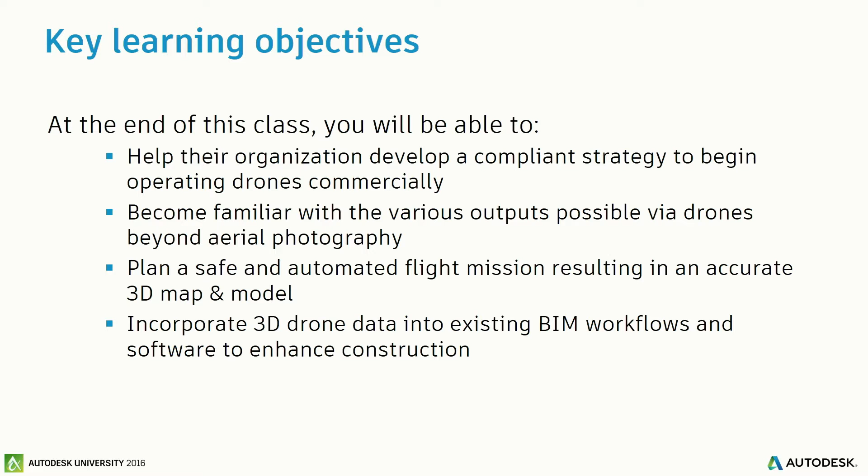Our objectives today: we'd hope that at the end of this course you'd be able to help your organization develop a strategy to operate drones in a compliant manner commercially, and become familiar, if not experts, on all the various outputs possible via drones beyond aerial photography. We'd also like for you to leave being able to plan a safe automated flight mission resulting in accurate 3D maps and models, and incorporate that data into your existing BIM workflows.

About VDC at B&G - I think it helps to understand why a construction company is interested in drones if you understand a little about what our group does. First off, about B&G: we're one of the largest privately held construction firms in the nation, a little over 50 years old, with over 2,500 employees and over 200 active jobs. We span the entire gamut of market sectors, from building water treatment plants to the Braves Stadium and everything in between.

We're heavily awarded - number one contractor ENR Southeast, number one green contractor ENR Southeast, ABC's 2014 National Contractor of the Year. We're doing about $2.5 billion in annual work. I say all this to illustrate the strength of our company and how far we've come over the last 50 years, from a small regional contractor to now having completed work in close to 40 of the 50 states.

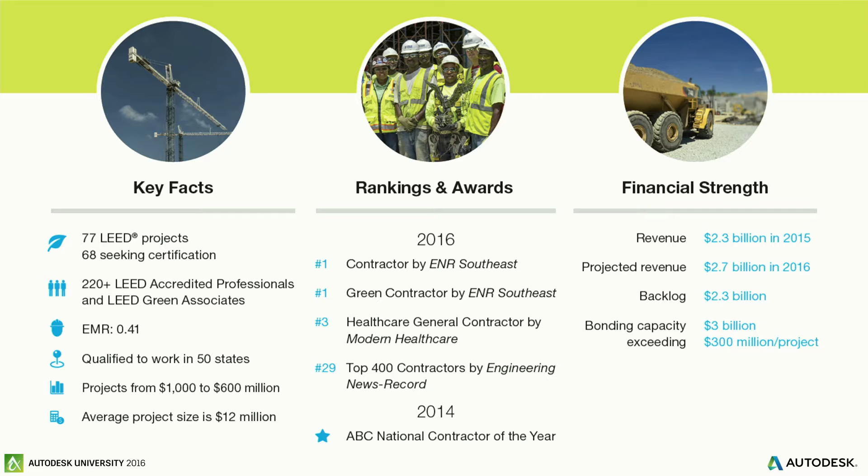About VDC - if you're in the BIM world, you've probably heard of VDC, Virtual Design and Construction. We're a BIM group, ultimately. We touch every phase of the construction process, from marketing and assisting with rendering, to helping our pre-con teams estimate quantities, to helping our scheduling teams with 4D schedules and animations, all the way to our safety and field operations with robotic layout, drones, and QA/QC.

Because of that, we're in a place where we get to work with a lot of emerging technologies, drones being one of them. We're also kind of reality capture experts across the gamut, with a scanning group in operation in-house. AR/VR is big for us, and many other initiatives.

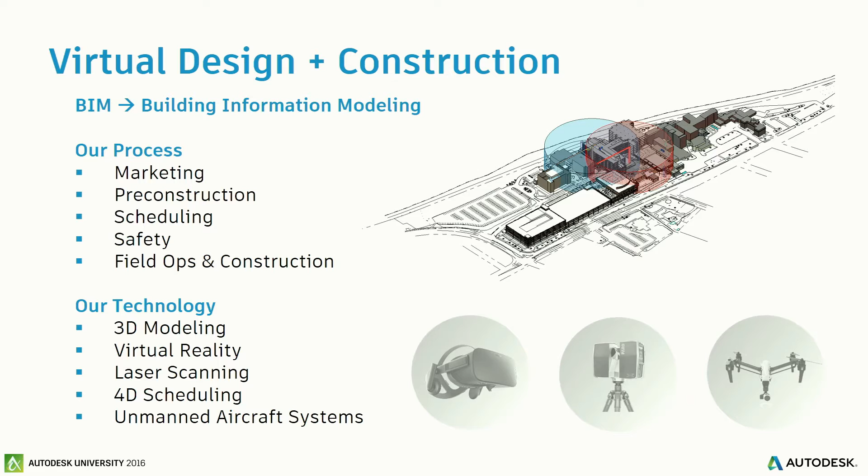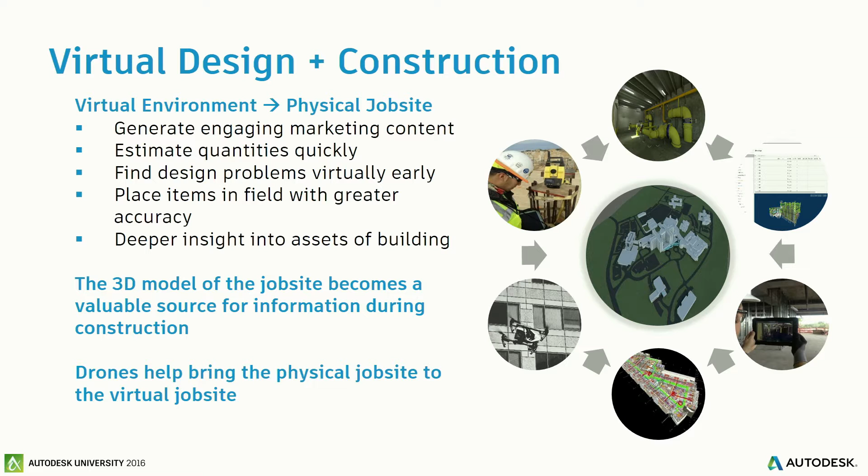So why are we interested in using drones to build 3D models? Our group sees it as our mission to make the virtual model mimic the actual job site, so all of those technologies feed into that 3D model. With drones we can get point clouds and bring them into the model along with our pre-construction software. We're all pushing information back to a centralized model so project teams have current and up-to-date information at all times, and that model becomes the true source of information for an active job. Drones right now are a really good tool to help bring that content to the model.

So a little bit about drones in general - if you're not familiar, we try to tailor this to every area of expertise or level of expertise. UAS is what we call them; we're not going to fight the battle of UAS versus UAV versus just drones. The FAA goes with UAS, so that's what we've decided to stick with internally. It's not just a children's toy, but a serious tool in the right hands with the right software.

So many of you may own drones, your children might own drones. Even with consumer-level drones and the right applications, you can get really valuable data, and it becomes a great tool for construction. We're seeing an exponential demand for drone services on our projects, both being driven internally, from our project teams, and externally, as our clients are starting to expect and request drone-based services on our jobs.

About the industry in general, over the next 3 years, it's estimated that drones are going to create a $14 billion economic impact in the US alone and create 70,000 jobs. So it's a real technology that's here to stay.

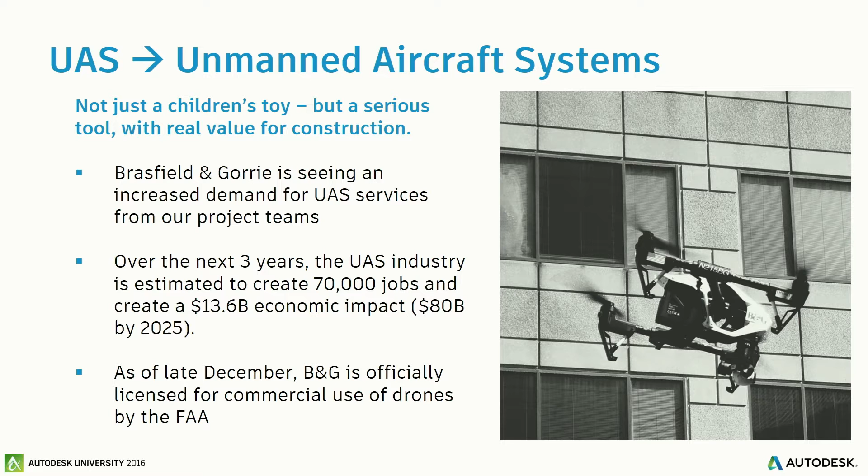And as of late December 2015, Brasfield and Gorrie is officially licensed for commercial use of drones. Those more familiar would know that as the Section 333 exemption. We were one of the first contractors in our state to get that, and we were really proud to do things the right way.

But how do they actually add value to our projects? Instant return on investment with drones. The cost of getting started with drones has come down so much that you can really fly the thing once and pay for itself. Everybody knows they're great for high-quality aerial progress photos and video, but that's really just the low-hanging fruit. We can do other cool stuff, like time-lapse videos, quick site familiarization, hazardous area inspection, which is really becoming big for our safety teams.

But when you take that further and start creating 3D models, you get a much deeper level of project insight. We're able to generate a point cloud and 3D mesh, take measurements within that environment, quantify stockpiles, quantify area, and so forth. Then we can start to daily monitor our progress, such as how much earth did my site work subcontractor move yesterday, or where are we according to schedule. We're able to get that information real time, really quickly by using unmanned aircraft systems.

So to get these models, how does that work? Many of you in the reality capture field are probably familiar with photogrammetry, a big long word for really complex algorithms basically. By taking 2D images that are geolocated and running that through specialized software, we're able to stitch those images together based on common parameters into a 3D point cloud. Basically, you can think of it as a method to take 2D images into a 3D model.

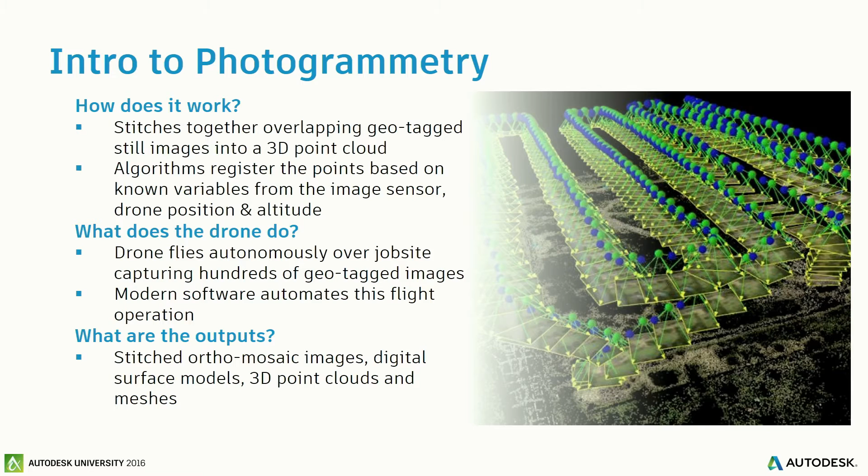So I would hope to share a little bit about where we've come from next.

Kind of our first getting our feet in the water with drones and uses, and trying to figure out whether or not this is something that we were going to actually pursue. I'm going to tell you a little bit about a project. This is actually located in Birmingham, Grandview Medical Center, and it began construction about 10 or 12 years ago, and the project stalled after we completed the shell of the building due to insufficient funding, some other things. When the project got picked back up, there were concerns with the integrity of the facade of the building. So we saw this as an opportunity to see what possibilities were out there.

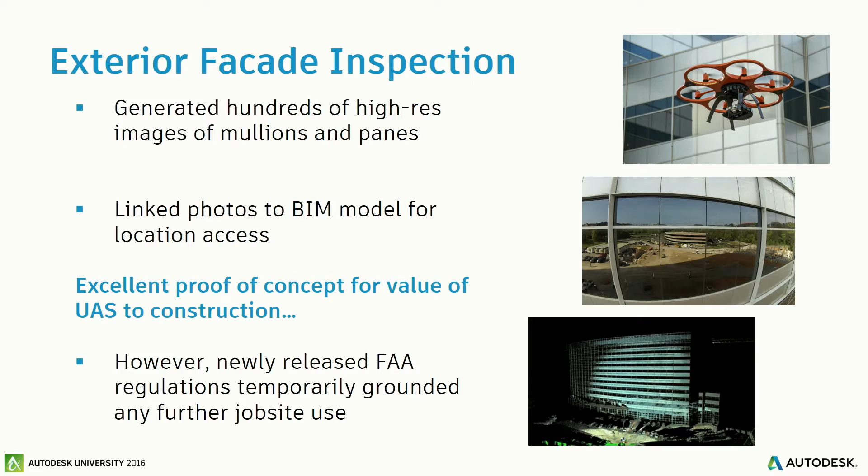So we partnered with Auburn University and Leica Geosystems and went out to the site and actually utilized the drone to go through and take very detailed photographs at every intersection of mullions on the curtain wall, and used that basically as an inspection. The value of this would be, instead of having a swing stage or something like that set up and having personnel out there setting up multiple times, going back and forth to manually inspect it, we're able to fly a drone out there, and we actually geolocated all the photos and linked them to a model as well.

So testing and challenges.

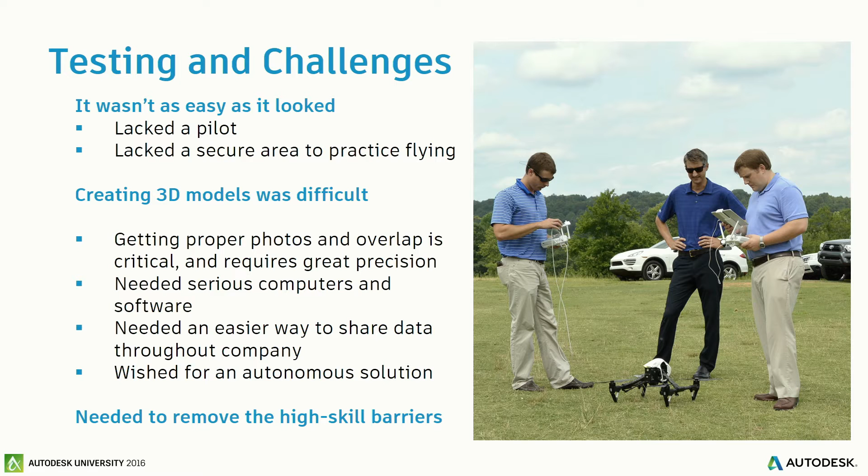Not very long after that first flight, the FAA released new regulations, and basically we were grounded. So commercial flight became a no-no for us, and we started doing testing in a controlled environment on private property, basically figuring out what are the limitations of this technology, what can we use it for, what can we get out of it. Back then we were doing manual flights, and it was very clunky, very high skill level, and we weren't getting great results out of it. So we needed to eliminate some high skill barriers and streamline the process.

Along with learning the actual technology and how to utilize it, we also had to start looking at the regulatory overview and how to get there legally, as well as the ability to fly and utilize the technology.

We flew that Grandview job in 2014. Early 2015, the FAA released their first comprehensive guidelines for UAS flight, outlining the Section 333 exemption process. We were fortunate to have in-house aviation teams and legal counsel help us write that petition, and we filed for our exemption in July of last year.

At the same time, we weren't naive enough to think that, with drones being as affordable as they are, some of our project teams might not know all the rules in place. So we wanted to educate the entire company that while we want to use this technology, there's a framework we have to operate within to do it the right way, in a compliant and low-risk manner. We actually issued a company-wide stop notice on any drone flight, asking people to contact our group so we could help set it up correctly with a licensed external vendor or in-house.

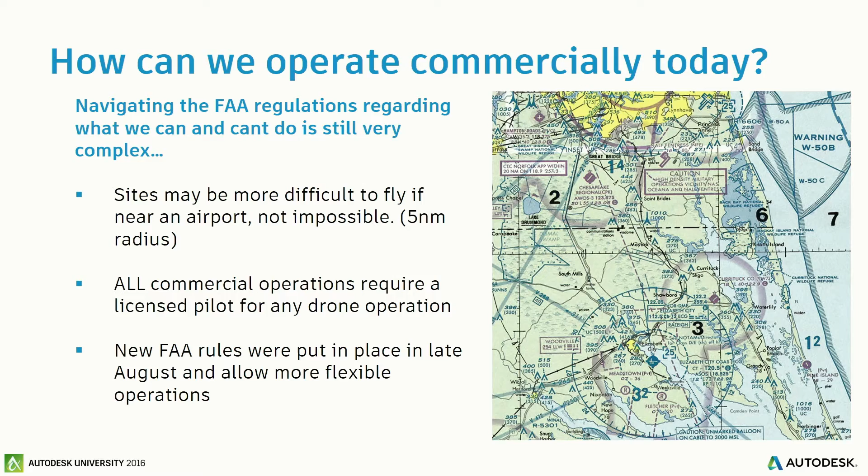These rules took effect in late August of this year, and we've been operating under them since.

Quick overview of what makes it commercial use. Anybody in this room interested in taking drones back to your organization is probably going to fall under this bucket of commercial operation - selling progress photos or video, providing contract services like surveying or hazardous area inspection, progress monitoring, things like that. These are all things the FAA has determined are commercial operations falling under this category of regulation.

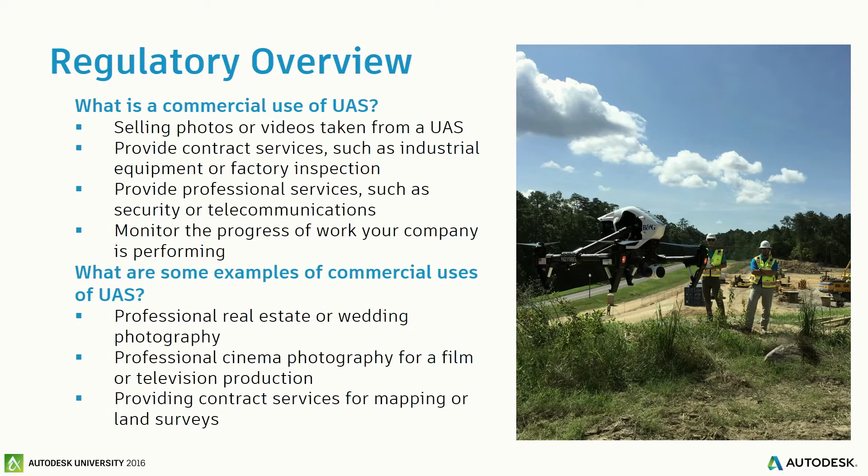And what do we have to do to get that certificate? There are a few requirements for the pilot themselves. Must be 16 years of age. It's not on here, but I think English, being able to speak English is a requirement. You have to pass a TSA background check. These are all things that must be in place to earn that remote pilot certificate.

There's a few drone-specific regulations. This list is by no means all-inclusive, but it's got to be less than 55 pounds, so larger drones require specific exemption petitions. You've got to check the drone out each flight. There's a lot there. It can't fly faster than 100 miles an hour. And then the location of your site matters greatly as well. There are certain spaces that are prohibited for drone use without special permission.

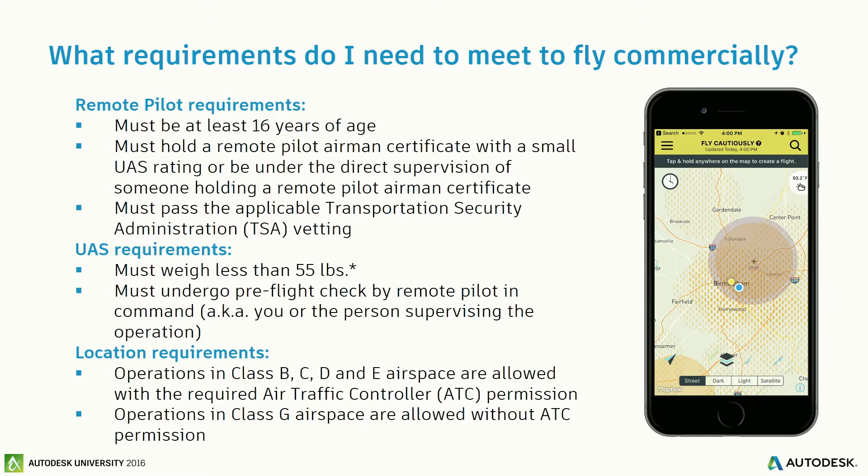But kind of what's cool about the whole drone space and how fast it's moving is that we've seen the industry respond with a lot of neat tools. This on the right is an application called AirMap. They have an iOS app, Android app, desktop app, where you can quickly share your location and see what airspace you're in. Is it a no-go? It'll turn red and tell you that, yeah, you're not clear for flight here. So it's made it a lot easier as companies have responded to all these challenges.

So what about when you're flying the drone itself? This, again, is by no means every rule. There's probably 30 pages of documentation just for during the flight. But quick overview, under 400 feet above ground level, daylight only, less than 100 miles an hour. You have to maintain line of sight on the actual aircraft at all times, but you can enlist the help of other dedicated visual observers to help maintain that requirement. And then a big one is not flying over people that aren't direct participants in the operation. And no flight from moving vehicles, although that might be more challenging than it's worth.

So with all these rules in place, what can we get from it? Why is it worth it? We're going to go through some of that next. Thanks.

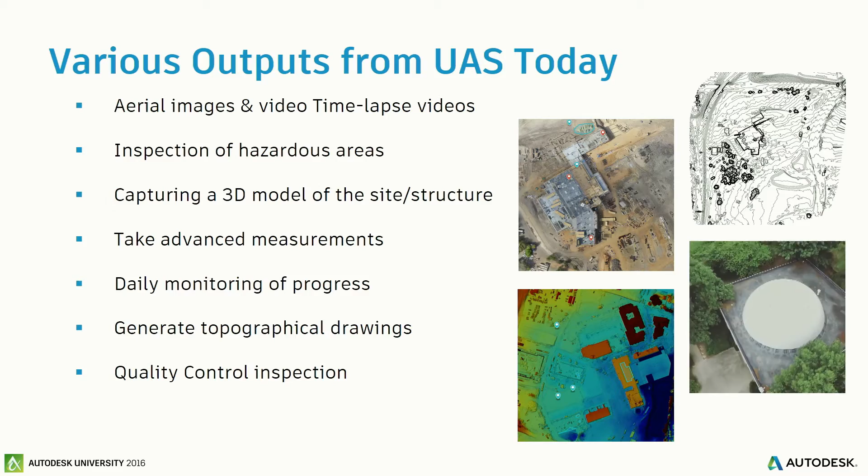All right, so I'm going to go through some of our outputs that we get from flying these drones on our sites, and just a brief overview. Aerial images, videos, things like that, inspections, 3D models. We can do measurements from all these orthomosaics that we're producing, and a lot of progress tracking and things like that. So, the low-hanging fruit of this is just aerial progress photos.

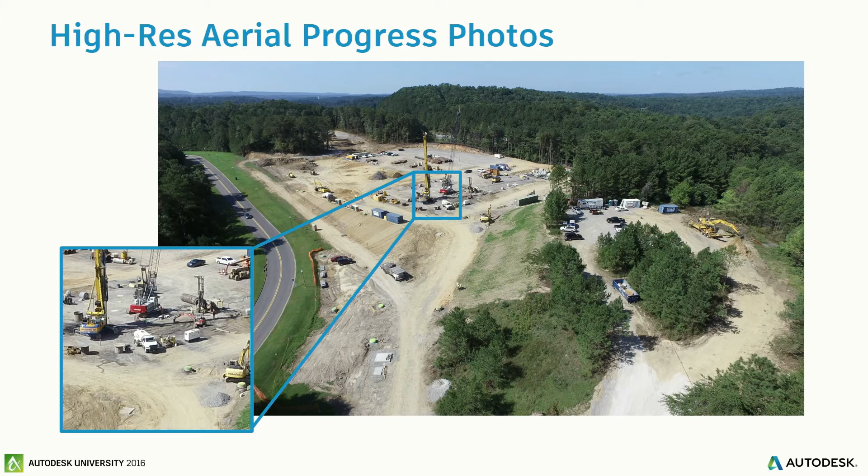This is something that we would traditionally get from a large aircraft, and maybe we'd do once a month or something like that. With project teams having access to this, they can take photos as often as they need to or want to keep our managers that are in the office up to date with what's going on site.

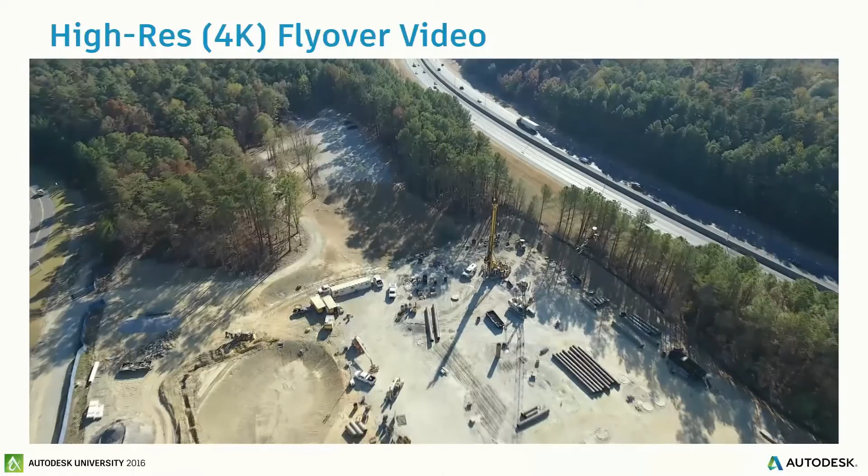Videos, these are great for marketing. Our owners love to see this, and this is just another way of showcasing what's going on the job site. Most of these come with 4K cameras on them, so we get very, very high resolution and great images from these.

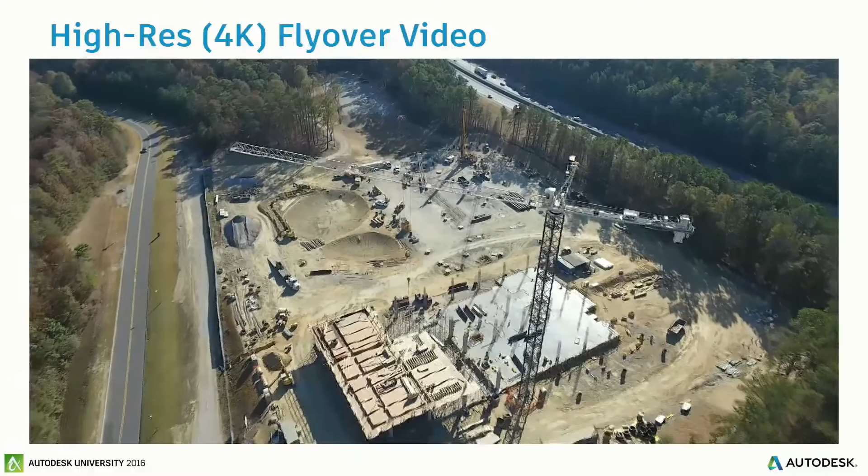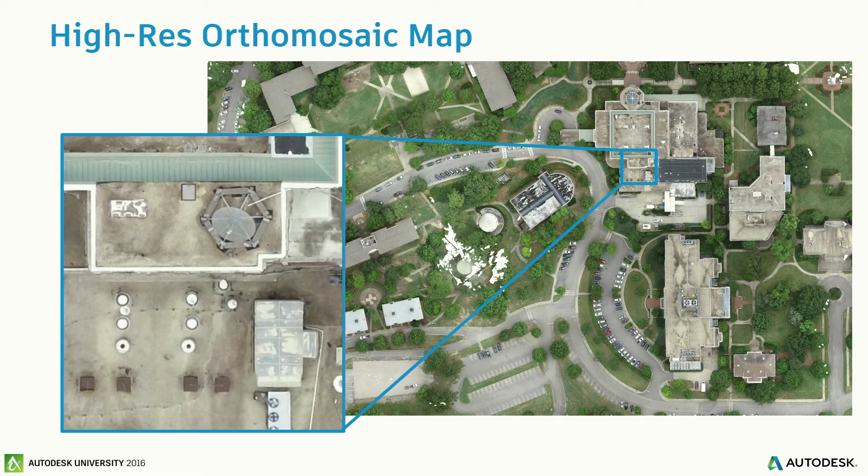An orthomosaic map. Okay, so this looks like just a single photograph from very high altitude. However, it is not. This is, I would say, probably several hundred images stitched together to create a map of a campus. And because these images are taken from a very high resolution camera, you're actually able to zoom in and see a lot of detail, such as rooftop units, things like that, from this entire campus. And this is great for a lot of site logistics planning and safety analysis and things of that nature.

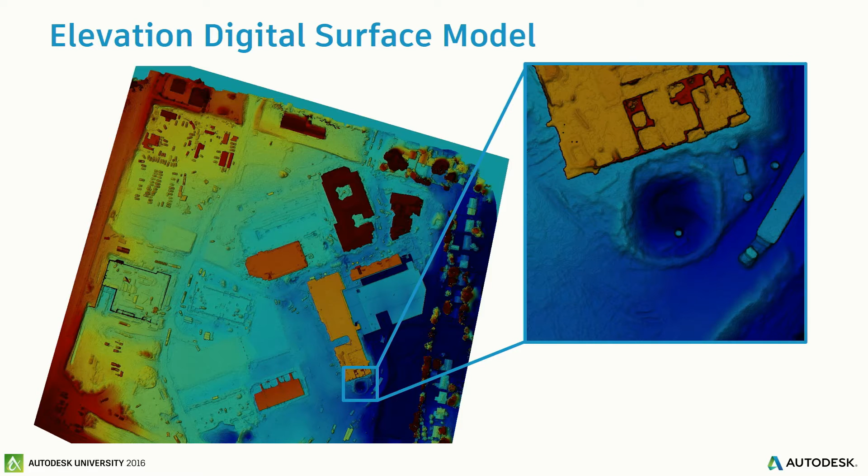Elevation heat map. So this shows you, and this is not a thermal heat map, this shows elevation breakdown of colors. So this helps us understand from a very quick glance what exactly is going on our site. With red being a higher elevation and blue being a lower elevation, you can see that our site is falling away to Project East.

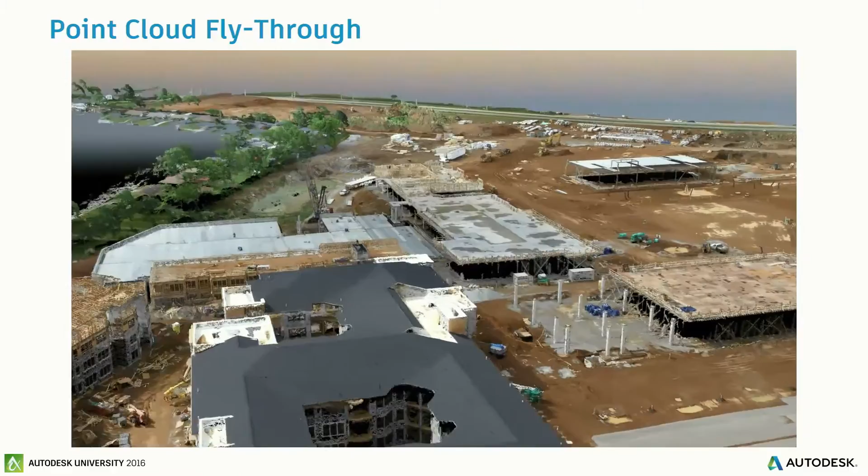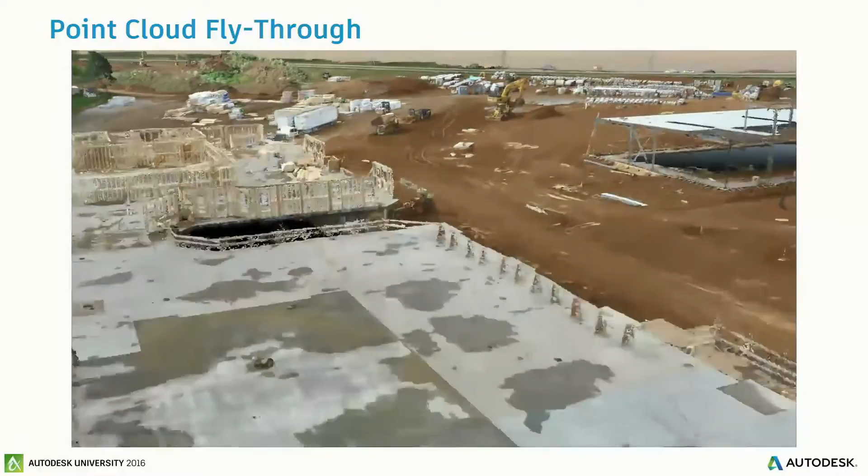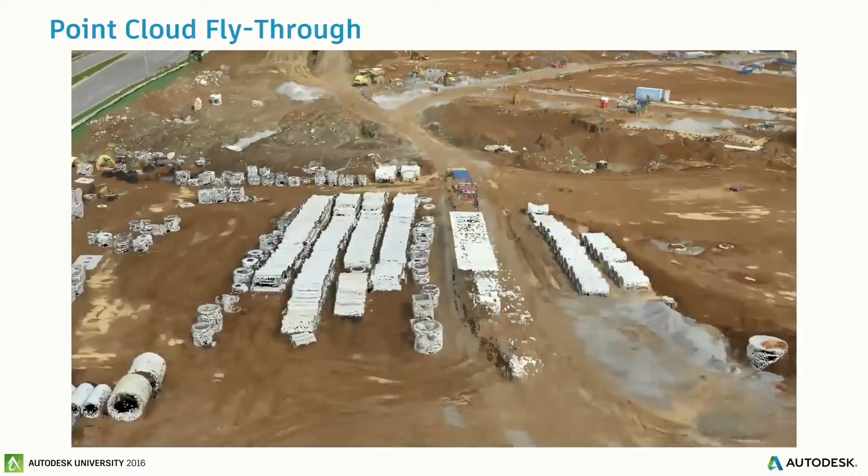Point clouds. So from these high-resolution images, like Hunter alluded to earlier, you can actually generate a three-dimensional point cloud and maneuver through it and walk through it in Navisworks or whatever other software that you're using. And the resolution that we're getting from these is quite astounding. You can see individual studs in this point cloud. You can actually even see the power lines that are going through the site. So this is a huge tool for us as far as logistics, planning, where's our equipment at, where are our pedestrians at, where's parking, and things of that nature. So this is a very good way for us to get an in-depth look at the site.

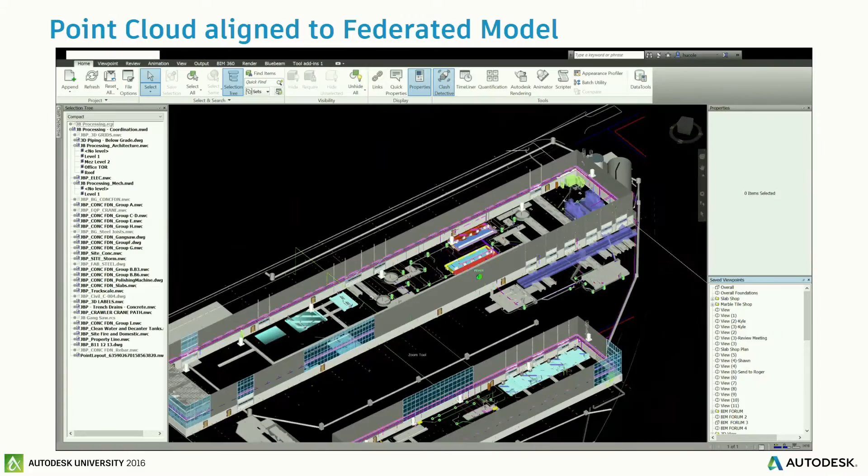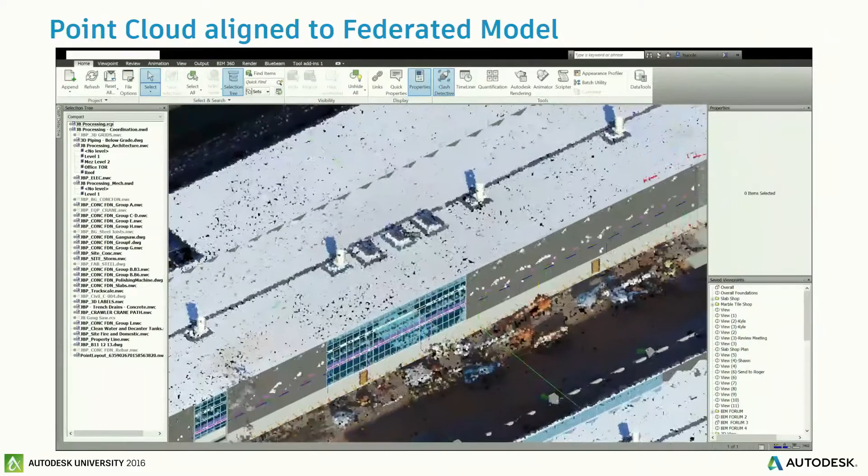So the end-all be-all for us BIM guys is having our federated model that has been coordinated, with architecture models, structural models, all of our systems. With that point cloud generated from a drone flight, we can overlay that using ground control points and align it with our models to actually track progress of design intent versus what's getting installed in the field, and use that to monitor scheduling progress as well.

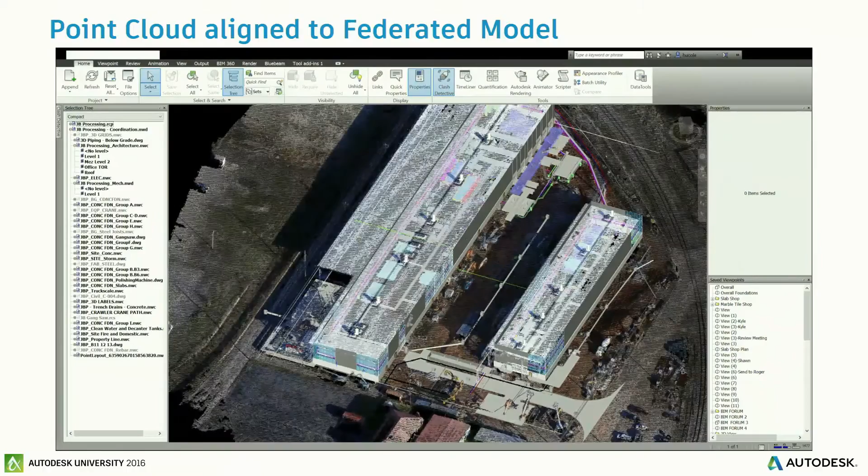Just to point out a little bit right here, you can see those rooftops, and then our utilities underground are lining up.

So what have we learned as we're getting all these outputs? What are we doing with this, and what are some actual real-world examples of what we're doing?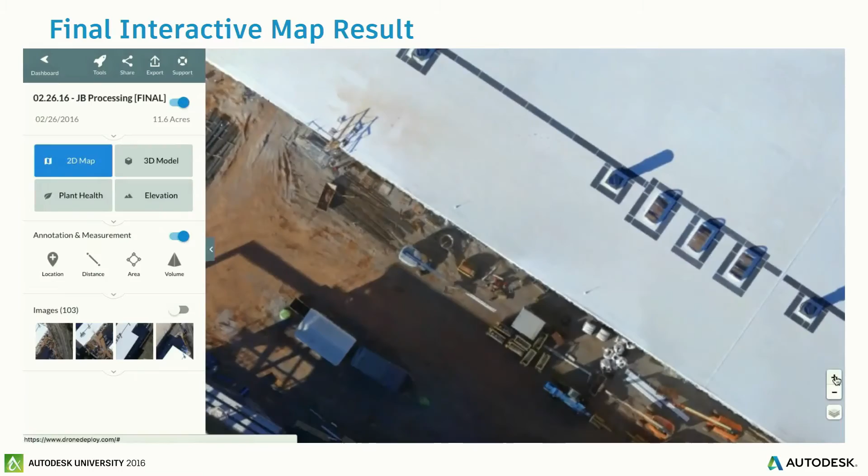So what you're seeing right now is just standard— sorry, I was looking for the laser. Can you click play real quick? It's fine if not, one second. Here, I got it. Sorry guys, one second. Should autoplay again—there we go.

So what you're seeing right now is just standard satellite imagery that's available from Google or Mapbox or things like that. You can plan the extent of the site you're looking to map right in this web environment. It's also possible to do this on your mobile phone or tablet, Android, iOS, the whole gamut, and it makes it really simple to set up your automated flight to map the area you're interested in.

They give you a lot of parameters you can adjust, like altitude and overlap. Some general rules of thumb we'll talk through later: the higher the overlap and the lower the altitude, the better quality model you can tend to expect. But that comes at the expense of battery life, because as you see it adjusted, there's a lot more flight paths crossing over that site, so it might take longer to accomplish.

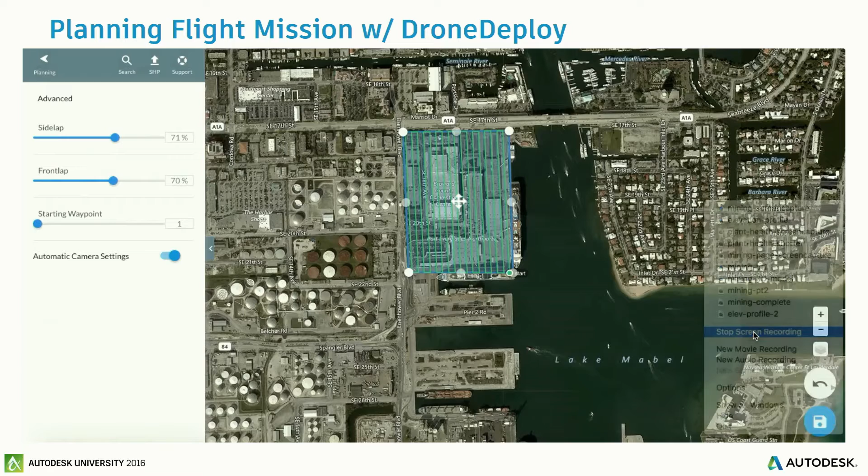That said, overall, we've mapped 60-acre sites, 70-acre sites, 300-acre sites in a matter of just an hour or two actually on site. So it's still very, very quick, these flight operations.

What's going to happen after you hit save and sync, you would mobilize to the site, open up the drone, power it on, sync it to your iPad, open this app, pull up this map or flight plan, and then you just hit fly. It'll go through a handful of safety checks, and once you've conducted your pre-flight checklist, you can launch the drone.

The drone is going to ascend to the altitude you planned, conduct that green back-and-forth flight route over the whole site, come back to the X and Y where it took off from, and land on a dime. It's been really impressive to see how well this technology works.

We're flying with DJI products, and I'll share a little bit more about our kits here in a second. But there are several other manufacturers that do the same thing.

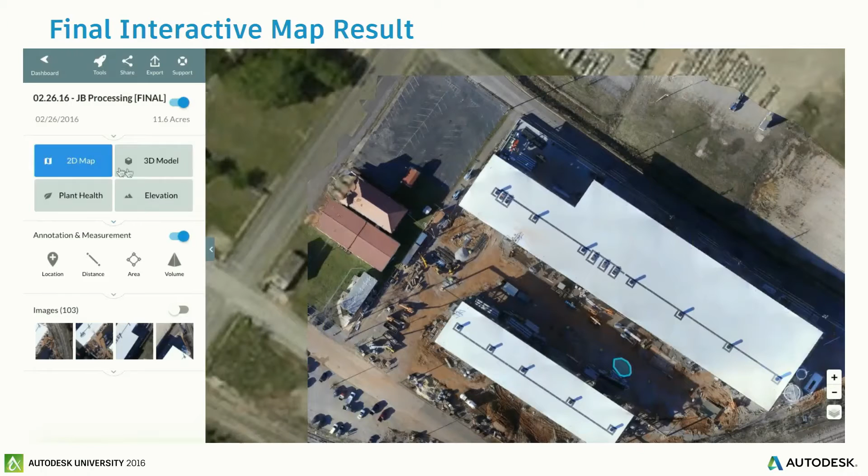So what do you get back? The drone lands, you pop out the SD card, upload the images to their processing engine, which is all cloud-based, and then it's going to crunch for a couple hours.

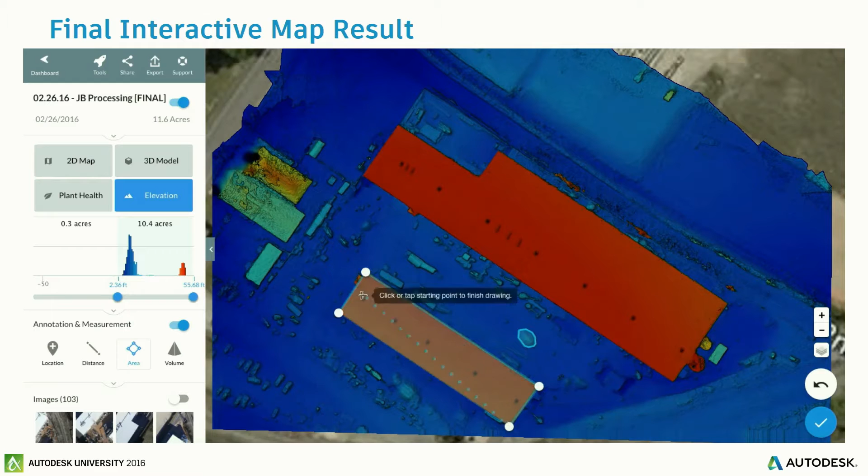And what you get back is this interactive map dashboard, where you see that ortho map, that elevation map, and you can take measurements and make annotations all in this environment, and share this with the whole project team.

You can invite all your key stakeholders—project manager, superintendent, architect. The whole team can collaborate in this environment and start really sharing what the current status on the site is, and those guys have insight into a job site in real time that wasn't really possible before this type of technology, at least not to share it this easily.

There's a share button at the top, it's just like inviting someone to a Box or Dropbox folder, and then you can begin to explore this data. So the final result is that same 3D model, which we'll load here in just a second.

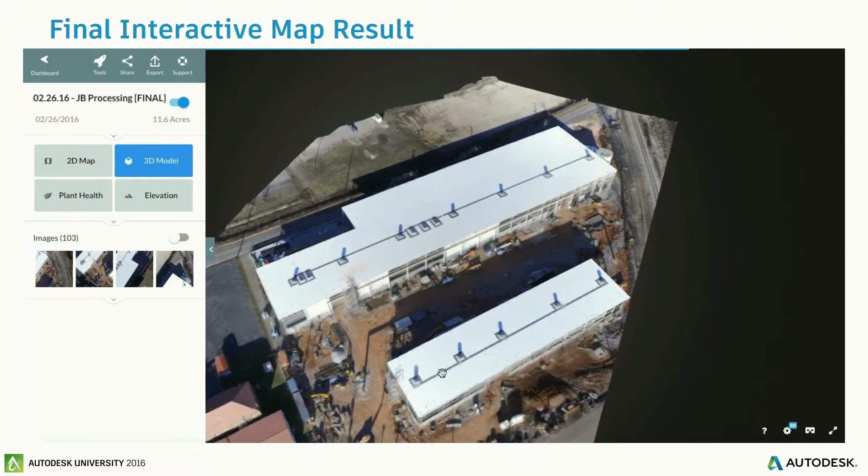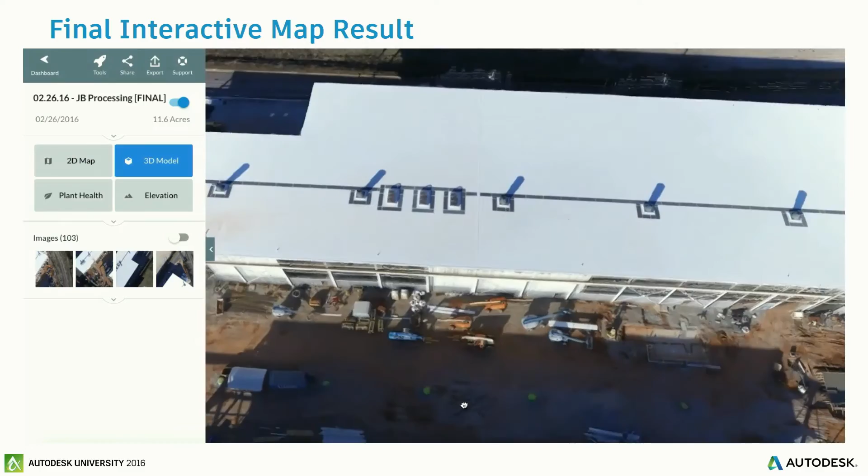This was the first job site we mapped back in February, a big industrial stone cutting facility in Birmingham, Alabama. This one wasn't quite enclosed yet, so there's a little distortion on the sides of the model. But when you export the point cloud and bring that into Navisworks or something like that, aligned with the federated model, it's a lot higher res data. So we've really enjoyed mapping with this solution and similar solutions.

A typical question we get is, what are you guys flying with? Attending other drone talks, you tend to think big industrial operations need $50,000 or $70,000 rigs with multiple sensors. But we've been getting really cool data with just standard off-the-shelf DJI equipment.

Our fleet right now consists of DJI Inspire series drones and even the DJI Phantom 4. Both are compatible with the app we just showed, and both have similar camera specs at 4K video, 12 megapixel still images. They actually announced new versions of both those products yesterday, so we're excited to get our hands on those and see the quality of our models continue to improve as the equipment improves.

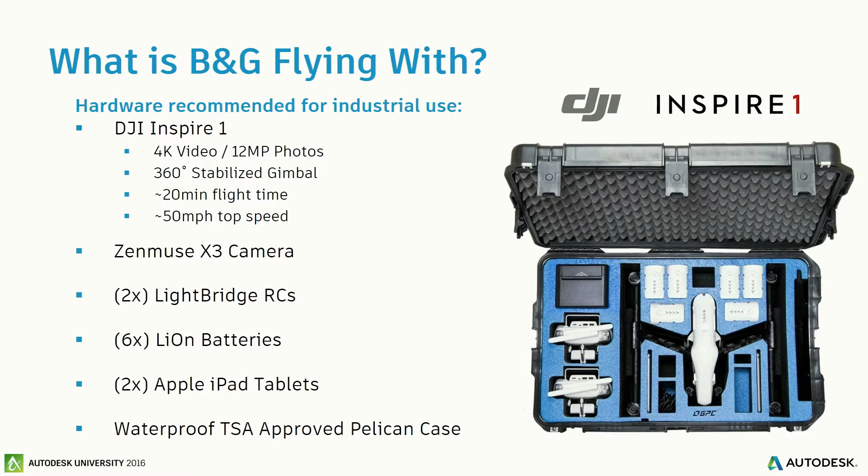If I'm mobilizing to a job site to fly, I'll bring this whole kit, concealed nicely in a watertight construction-grade case. This is sensitive equipment, and construction can be rough on it, so we protect our investment in nice cases. We bring the drone, all the batteries we need, multiple iPads, and multiple controllers so someone can operate the camera and someone can operate the drone's position. But you don't really need both controllers if you're just doing automated mapping missions.

Speaking of mapping missions, what are some things we've learned doing many of these now? We've come across tips to get better results each time. The more imagery, the better—though there's a fine line before you're just wasting your time. You want to maximize overlap, and if you can fly lower, you'll get clearer imagery of the object you're mapping, but that comes at the expense of battery life. So it's a balance of what quality data you actually need for the deliverable.

If it's a flight for marketing purposes, you may not need quarter-inch resolution visibility in the point cloud. But if you have a particular structure, like this parking deck in the center of this map—this is actually the Brasfield and Gorrie campus in Birmingham, we haven't flown it yet, this is just a mapping example—

if I was interested in this parking deck in the center, I could conduct an orbit flight after the automated lawnmower-style flight path, at angled varying degrees—45 degrees—and altitude, creating multiple orbits around that structure. When you supplement that nadir, or straight-down, imagery with oblique imagery, you tend to get a better point cloud in your end result.

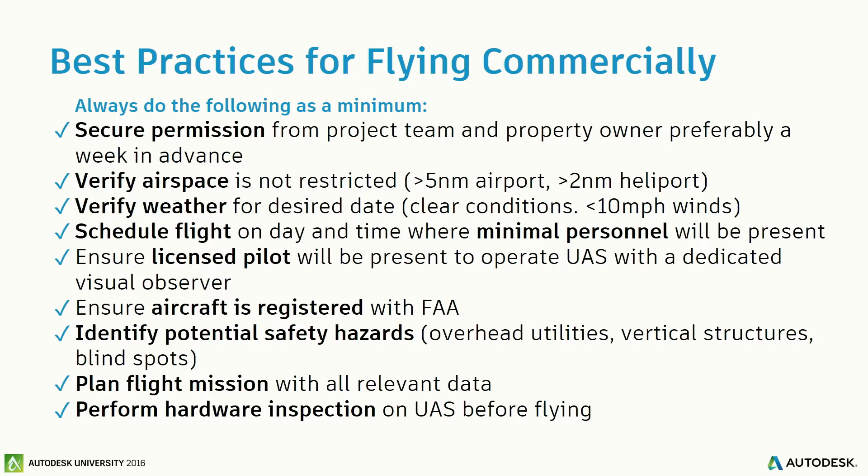And always inspect the actual drone itself for cracks, deformed batteries, things like that. You don't want to put it in the air if it's improper equipment.

So how have we been applying all these things we've learned to some of our actual jobs?

So I'm going to talk about a couple of case studies here real quick. This one is actually probably my personal favorite. It's a very large hospital down in Orlando, and I got a phone call from a couple of our field engineers, CJ and Robbie, and they were tasked with quantifying how much dirt we needed to take off site.

A traditional method of doing this would be basically using a total station and staking a point about every 50 by 50 feet. With a 62-acre site, that's going to take some time. And our field engineers, we perform a lot of work, so they have a day job being busy laying out our formwork, concrete, establishing control for our subcontractors and things like that.

So this would have been a time-extensive process. So they called us and wanted to know, with the drone technology coming out, was there a better, faster, more accurate way to do this?

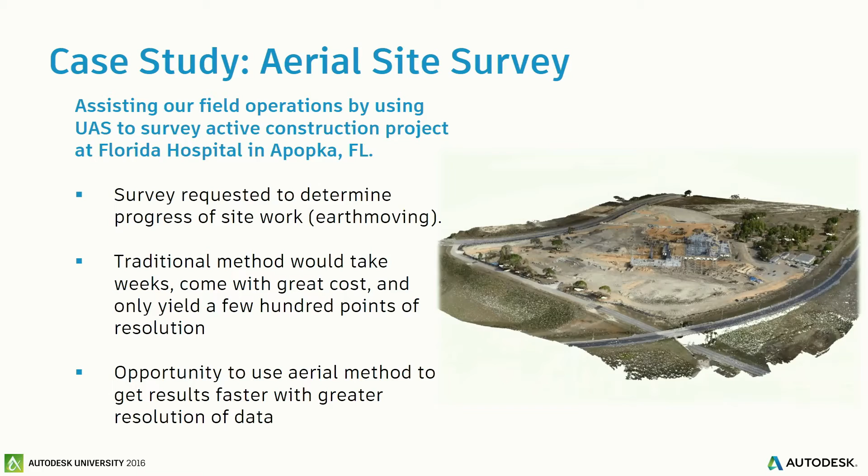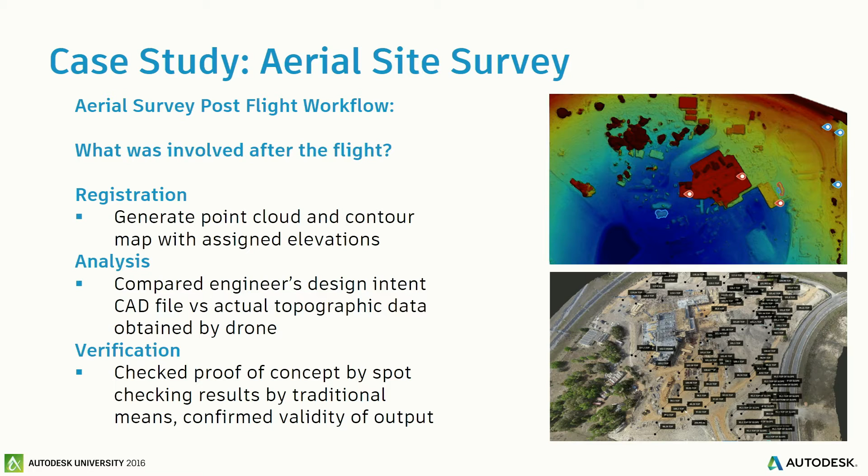So we went out there, and in a day, we flew the job site and got back and crunched the data, and we used control points that you can see right here, here, and here from our field engineers to align that with our model. So what we did is we did a comparison between the civil CAD file for the end of the project, what the dirt was supposed to be like, and utilized that to compare against our drone data to quantify how much soil still needed to be exported from the job site.

So this is our output. On the left-hand side, you can see this is the actual contour map generated from the point cloud that we got from DroneDeploy. On the right-hand side, this is the cut fill analysis of how much dirt actually still needed to be exported from the site.

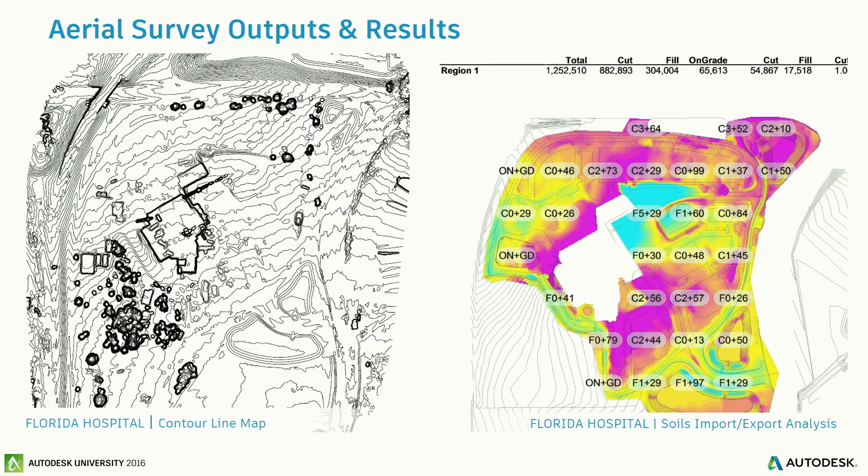So, like I said, we saved a lot of time, at least 2 weeks or so, in just man hours and things like that, plus post-processing. That really sped us up being able to just take that 3D model and export a topo file directly from that instead of a field engineer having to go and build that file and then do the cut fill analysis.

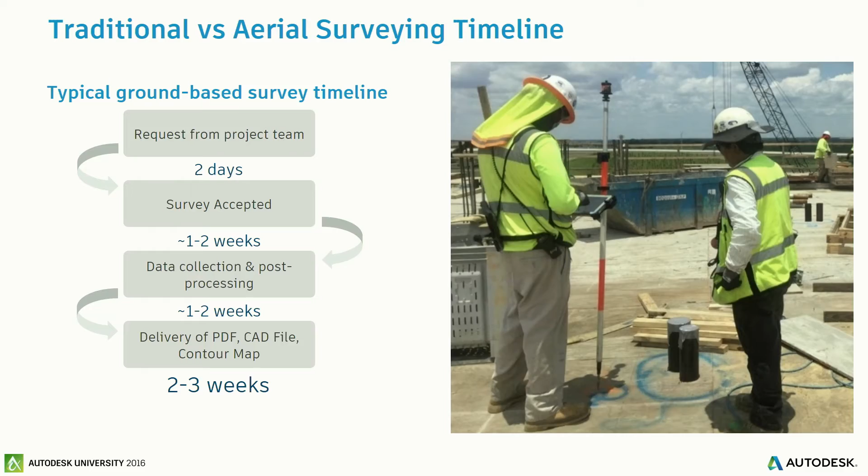Another case study that we found is we actually have our own equipment and supply division of Brasfield and Gorrie, which supplies anything from spinning laser levels to tower cranes. And typically on a job site, we would outsource the sizing and logistics of that crane to a third-party company. It takes some time. We wanted to bring that in-house and have us be responsible for the placement and sizing of all of our cranes.

So we developed a parametric family in Revit that is the exact model of what tower cranes we use on our job site.

We use that and place it in our Revit models to figure out how many tower sections and what our jib sections will look like, as far as sizing of the cranes, our radiuses, and clearances and things of that nature.

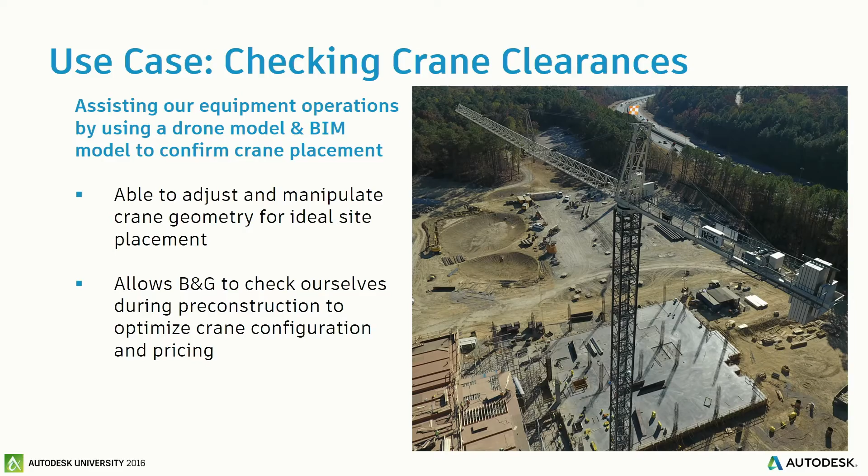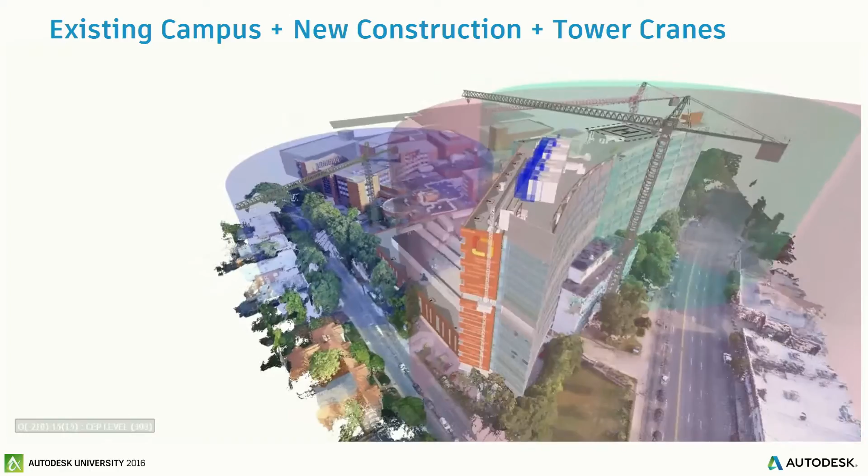Where drones play into this is we're able to fly a job site and look at how these cranes interact with each other and the proposed building, but also how they interact with the current site. This plays a huge role in figuring out where our assist cranes are going to come in, where our freight's going to be delivered, and how this interacts with existing conditions.

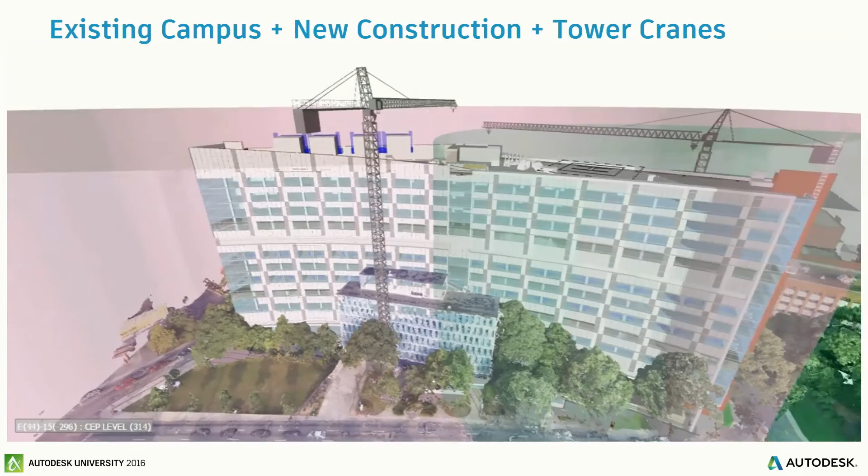So that's a demo of this building that's going to be demoed. But in this project, over in Atlanta, we found out that the initial placement of the cranes would have been in an existing mechanical yard that is not to be demoed. So we were able to go through and figure out exactly what parameters our cranes were going to be using on this project well in advance, and this is still actually at the schematic design phase.

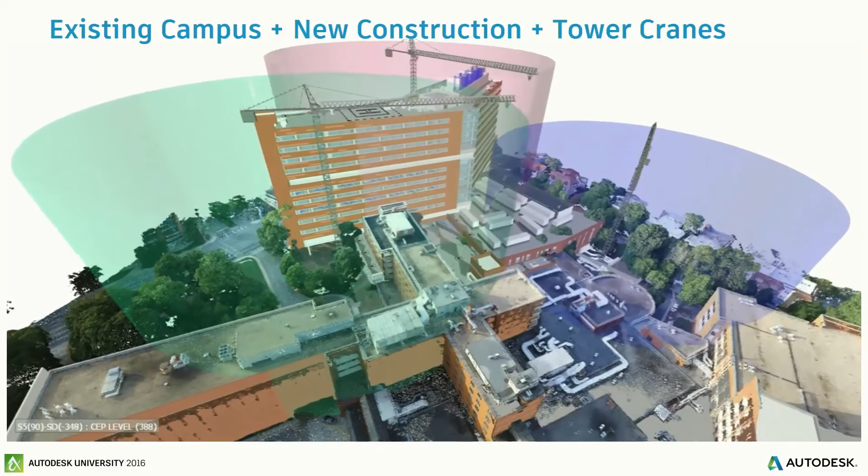Another use case we've seen is with virtual reality. That's very new technology, and people associate it with video games, kind of a gimmick. Where's the actual real value in this for construction?

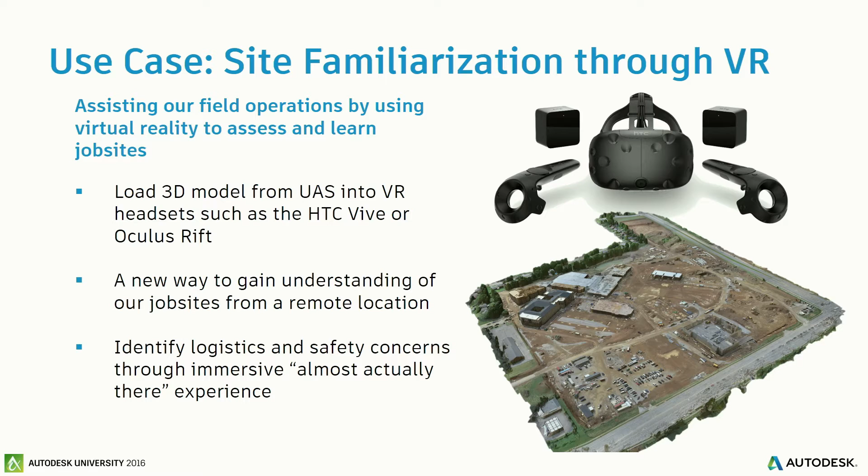What we're finding is the value is with these very detailed point clouds, we can load this into an HTC Vive or an Oculus Rift or whatever, and have our safety managers walk a job site that's all the way across the country and identify hazards, potential safety concerns, and things like that, getting a very detailed and specific job site safety plan without ever having to step foot on the job site.

So that's where we're at today. These are all the things that we're doing. But what does the future hold? What are we doing next?

Like we talked about earlier, we got our 333 exemption in December of last year. Part 107 came out in August of this year. What have we been doing since then? We've actually used drone systems on 19 Brasfield and Gorrie job sites in 2016 alone, and the majority of those have been since late August, when the new rules enabled people like myself to go get their remote pilot license without being a traditional pilot.

Initially, earlier in the year, we were dependent on the availability of our pilots internally to come help us out and supervise when we were flying. But since then, we've been flying a lot more.

We've got 10 on the books before the end of the year. So it starts to paint a picture of the exponential nature of these requests coming from internal project teams and our clients. To that end, we've mapped over 1,400 acres of Brasfield and Gorrie job sites through September. We now have 7 full-time Brasfield and Gorrie employees who are Part 107 certified, compared to 0 in August. You can really start to see how that's growing.

And we have plans in place to go ahead and train more and more in different regions of the company over the next year. All this might be intimidating, but you don't have to have 100 drones to accomplish this. We only have 5, and we see that number growing greatly over the next few years. Up until this point, that's the nature of our fleet, all DJI products, Inspire and Phantom 4 series.

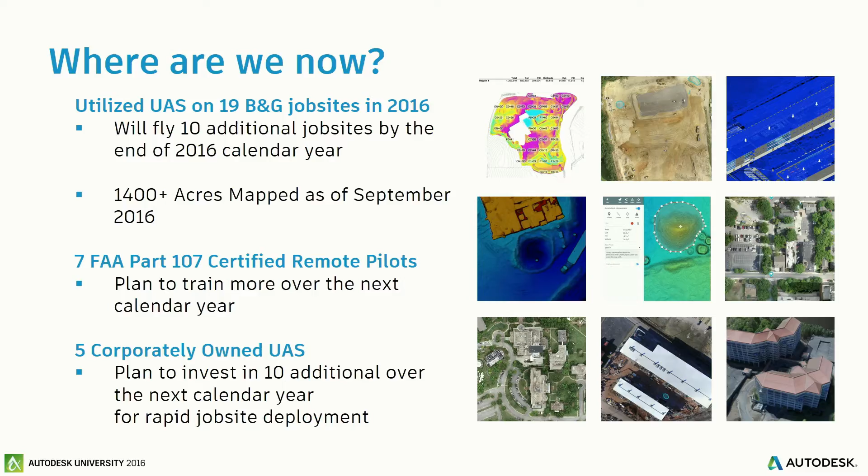And then that really starts to show people the value in getting this on their jobs.

So that said, Brasfield and Gorrie has over 200 active projects. How are we going to serve all those project teams with drones? Well, we've thought about it a lot, and we think there's three methods to put a drone on a construction site, at least for our company.

In-house performed: somebody from our group, the R&D and BIM group, can come fly it for you, plan the mission, do the post-processing. But that's not always most economical for a project team, especially if they want it done every week. That's going to get really expensive with people traveling across the country trying to serve these jobs.

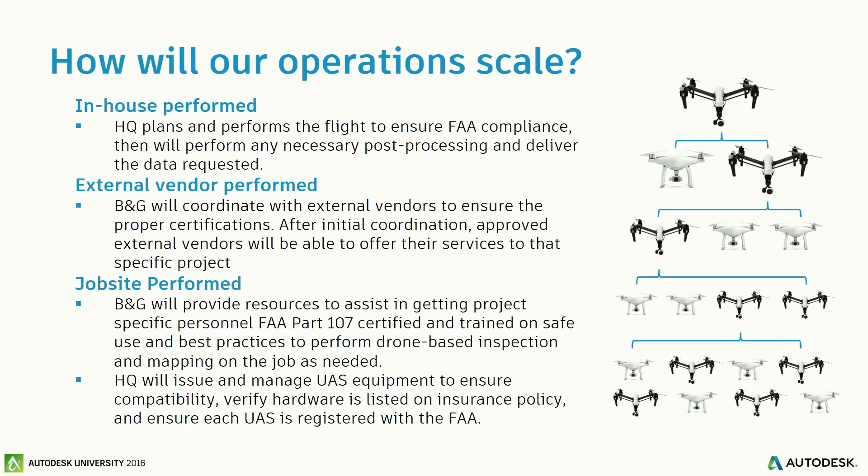So let's jump down and look at the third option that we think will be the most prominent in our company, and we're starting to explore this a little today: our team wants to provide resources for anybody in the company to get certified. That means putting together training courses and study guides and doing hands-on training on that job site with that operator so they can fly it as much as they need.

We still plan for the corporate office to own and control all the hardware because there are insurance concerns. We want to ensure every drone gets insured, gets registered with the FAA, and that it's compatible with the softwares we've invested in. So it makes sense to control that equipment from our group.

The third option may not make the most sense for somebody who just needs a one-time flight in a remote location, like projects we've built in Montana. It doesn't make sense for me to come to Montana, and it might not make sense for somebody on that job to get licensed to fly. So we're going to have to learn how to work with external vendors.

And they're a dime a dozen right now. Speaking personally, I probably get 10 requests a week from people wanting to offer services to our company, which is awesome because that's really going to help us, and we want to work with those guys.

But at the same time, if you're bringing a drone onto our job, you're really no different than any other subcontractor coming to hang drywall or do site work, in that you're going to need to comply with our safe operating practices and safety orientations that we'd ask of any other subcontractor, along with minimum insurance protections.

So we've worked with our legal teams to develop what we're going to ask of these guys. We don't want to make it impossible for them to offer us services, but at the same time we've got to protect ourselves and our employees, and make sure whoever we let on our job sites is up to the same quality as the subcontractors we'd select to build that project.

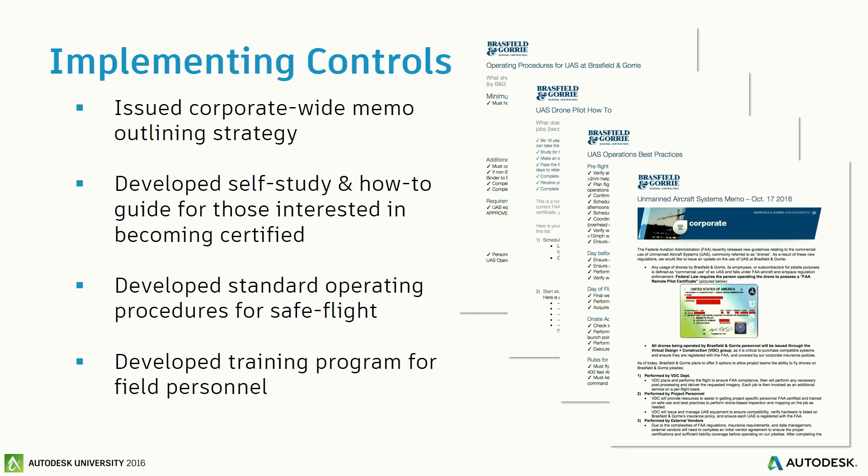So that said, how do we help that person get that drone that might be interested? Well, we've set up a checklist or an equipment request flow that will protect us to make sure equipment isn't issued before somebody is licensed and insured. We set that up just like somebody would request a laptop for their project, an Apple TV, or a Leica Total Station. It's the same document.

Hey, I need a drone on my job. I know it's coming up, we're a few months out, I have time to train somebody, this is how we're going to do it. So they request that, and we reach out to that would-be operator and start giving them that study content.

And hey, here's how you take the test. Having taken the test, I think anybody that studies 15, 20 hours could go and pass it. You're not going to walk into it cold and pass it, but it's not impossible for anybody with zero experience with drones to study for a short amount of time and then pass that test.

So once a would-be operator has passed that test, we'd order their equipment, assemble it, update it, register it with the FAA, get it enrolled in our software, and then insure it. We're insuring our drones the same way we insure our typical aircraft with the company, and this affords us a lot of flexibility in protecting ourselves if an accident were to occur on one of our jobs.

Once all that's in place, we'd schedule a time for somebody from our group, like myself or Jesse, our regional drone leads in other offices, to go train that person and get hands-on flying time, because it is possible to get that blue and green license card without ever having flown one of these, and that would not be a good recipe for putting a drone on a construction site.

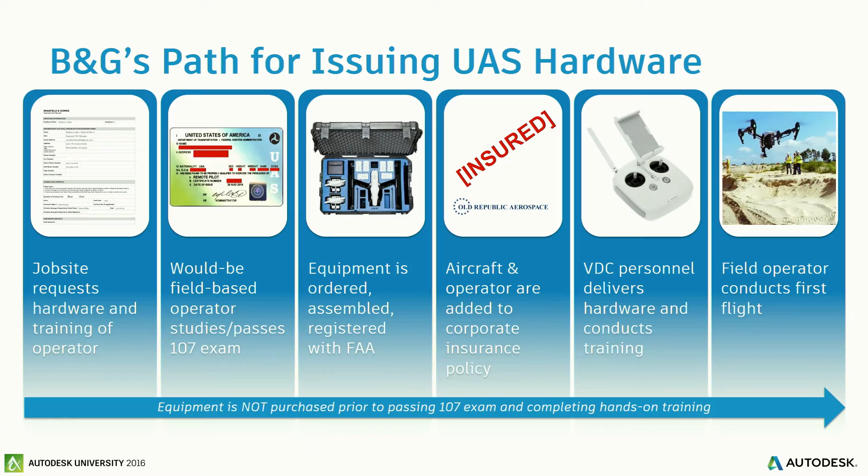So how do we track it and maintain traceability of this equipment? We really didn't want to reinvent the wheel here. Anyone in the construction industry is definitely familiar with the hard hat sticker. It's kind of a rite of passage or a badge of honor. So we wanted to honor that and not try to do something totally different.

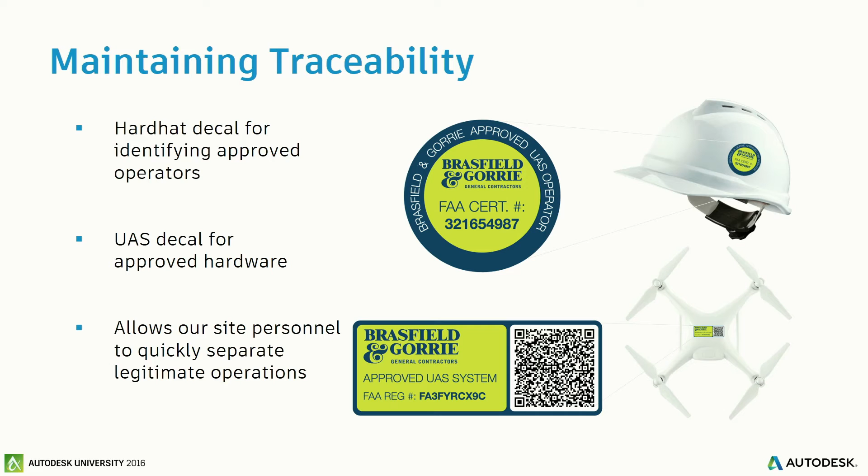So if somebody's passed their test and they have their FAA certificate, then we're going to issue them a hard hat decal, just like their OSHA 30-hour sticker. We're going to issue them an approved drone operator sticker. Same thing with the hardware itself. We want a quick and easy way for our field teams to identify, hey, this operator and this drone are legitimate, or hey, it potentially might not be, and I need to ask some more questions. So this is hopefully just going to provide a better level of understanding for everyone to identify and separate legitimate drone operations from potentially illegitimate drone operations.

We've been talking a lot about how it's going to scale in the future, and we think we're starting to get a better idea of what that's going to look like. These new rules that came out in August have added a lot of flexibility for us at B&G, as you've seen, as we've flown more and more jobs over the last few months. So that pilot requirement changing really helps us out.

We're more flexible in the airspace we can operate in. They've provided channels for us to request flying in areas that may be more congested, like bigger urban areas. There are easy ways to request that exemption online now.

And then the next generation of technology is going to be equally as impressive. If anybody's followed drones for some time, you've seen what we bought last year as the top-of-the-line system. The better system now is a fifth of the price and this size, and has nearly all the same specs, if not more.

So it's moving really, really fast, and we're going to see things come soon like object tracking and machine learning, where the software is going to be smart enough to identify that excavator in its exclusion zone, and that guy over there that's maybe down in a trench in his exclusion zone, and when those things line up, it's going to send a notification to somebody in the job trailer that, hey, we might have an accident, we need to go check it out and prevent it before it happens. So that stuff is not far away.

We're going to see more and more sensors come onto these drones. Thermal's huge right now in ag. It's making its way to construction. We haven't done a lot with it so far, but we've seen some interesting case studies with building envelope confirmation by thermally scanning and producing a 3D mesh that's a thermal heat map, and being able to confirm that building's envelope for LEED certification and things of that nature. That'll be a huge application we look to get into.

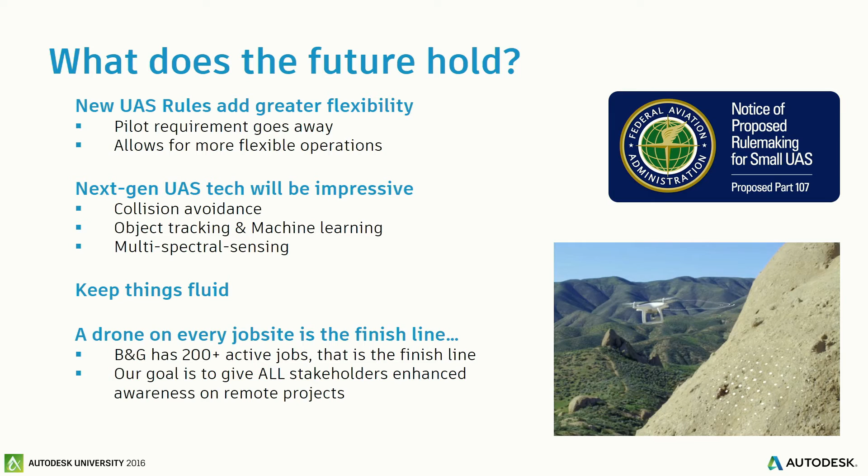But we look forward to that future, because our goal is to give all stakeholders involved in the construction process a new level of insight into what's going on at our projects and make everyone feel like they're actually there, so they can participate in the decision making, whereas construction is typically you have to be there to participate, and drones help remove that burden a little bit.

So that's where we think it's going, and we hope that you learned a little bit about what we've been doing the past couple of years. We haven't claimed to be the total experts. We're really humbled to be here and get to present on it, but hopefully you learned from what we've learned ourselves over the last couple of years.